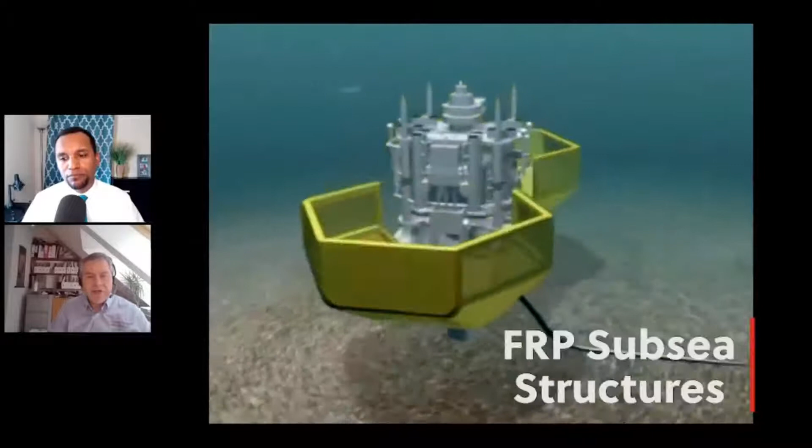This is where CapEx savings can come in with FRP. So let me explain the cocoon. This is an NOV product, as we call it, the cocoon and shroud, and it's a wellhead tree protection structure.

In shallower waters, particularly where you have wellheads installed like this, they're vulnerable to dropped objects from above, and also particularly vulnerable to fishing systems from fishing boats that are trawling in the area. So these structures need to be protected in some way.

In shallower water, traditionally what customers would do is install some sort of steel protection structure. This would be a freestanding structure over the whole of the tree, and that is inordinately big and expensive to do. So the cocoon is quite an innovative alternative to this.

It connects directly to the tree. It doesn't need independent foundations. It gets its strength and integrity from actually attaching itself to the flow base of the tree. It primarily comprises of these two large doors. You saw those in the graphic.

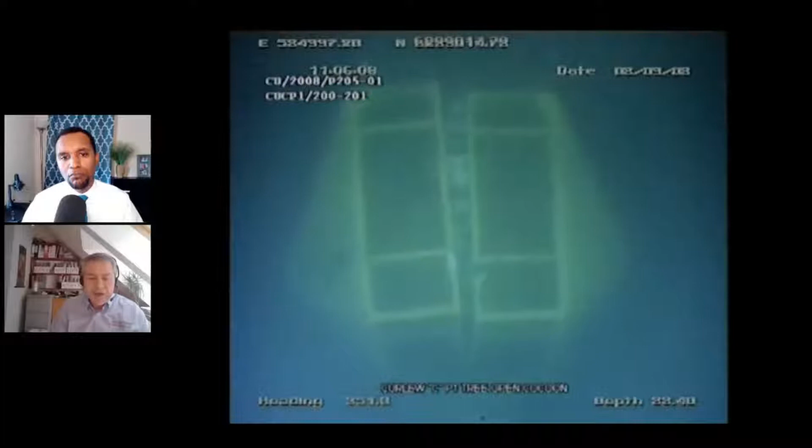Here you can see a subsea video of the cocoon with some divers working on the installation of the cocoon. These doors fully open and allow incredible access to the tree that's inside, the cocoon is actually protecting itself. So when these two doors are closed, they completely wrap around the wellhead and completely enclose it, protecting it.

These doors are pretty big, about 6 meters wide and about 5 meters tall. You can imagine these doors in steel would be extraordinarily heavy. Each door in steel would weigh around 4.5 tons in air. Now in FRP, each door weighs only 1.5 tons. So you can see straight away there's this massive saving in weight coming into play.

But if you look at that weight subsea, because the density of fiberglass FRP is only around 2, that weight almost halves. The weight submerged for each half is only around 0.75 of a ton. So this makes a structure which, while it's large, is very safe and very easy to open.

Operators can use perhaps smaller vessels, which are cheaper to use, or they can even use airbag systems, all of which are cheaper in cost. So from a CapEx point of view, the cocoon brings the advantage of being able to use smaller vessels for the installation phase, as well as for the operational opening phase.

Initially, this service started as a means to outfit our FSTs with the technology to help with remote support. It's an augmented reality headset that we attach to a hard hat, and it has a little viewer that goes right in front of their line of sight. It gives them basically what is akin to a 7-inch monitor in front of their eyes. They're able to move that viewer up and down, so it's out of the way if they don't need the two-way video. It also has noise canceling headphones. So what they're doing is putting on the headset, putting on the headphones, and then connecting back to our remote support services at the office.

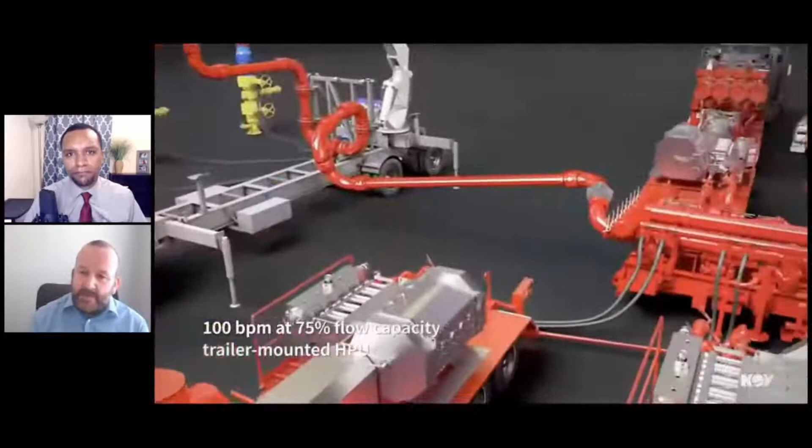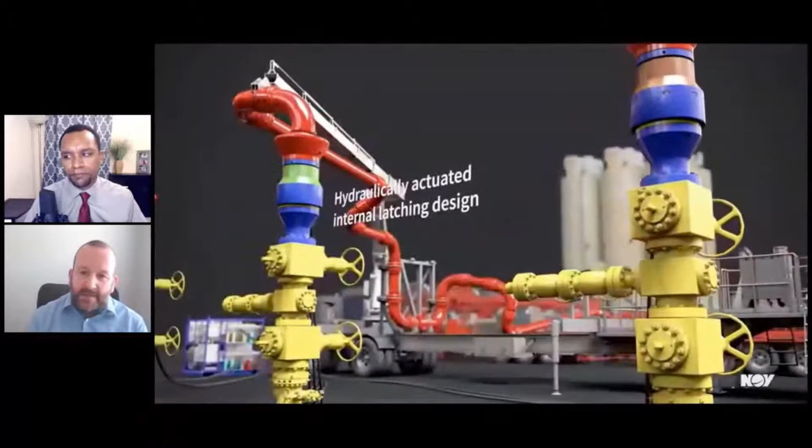In terms of the benefits, the main benefit of the FracMax system is that for the customer, the rig up and rig down time is dramatically reduced. Typically, if it's 2 days to rig up a conventional zipper manifold setup and 2 days to rig down, that's a total of 4 days. With FracMax, you're looking at 1.5 to 2 days. So you can get the equipment on site quicker, off site quicker as well, and the customer can then increase their utilization of the equipment.

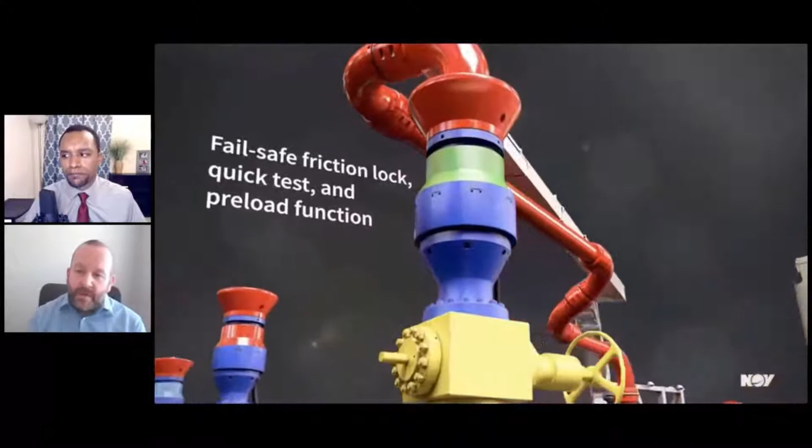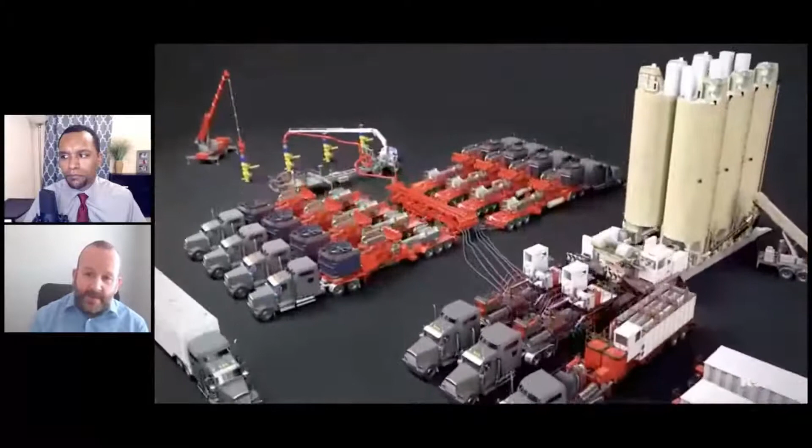The second part of it, though, is the number of assets that the customer has to manage. Every item in a conventional setup, in terms of the flow line, has to be managed, tracked, and certified, typically every 6 months. Now, what we're doing with FracMax is reducing the number of components that need to be managed by 90% typically.

So when you look at this particular area of opportunity, one of the questions that could come to mind is, why now? Why tackle this challenge now?

Operators, drilling contractors, oil field service companies, rental companies, kind of everyone in the oil field can reduce risk and costs of their operations by eliminating the guesswork on how best to use and maintain their assets with a good asset tracking software. A colleague said it's not a luxury anymore, it's a necessity, and I really believe that. So Max Track and Trace delivers much needed confidence, clarity, and cost savings to customers.

It's going to allow them to always know they're selecting the right tool for an application, so they're not adding cost or risk to an operation. It's going to help them simplify workflows so that they can improve efficiency, and it's going to allow them to make informed, data-driven decisions on how best to use and maintain their assets so they can increase uptime and reduce maintenance spend.

So when you're looking at PowerBlade and you incorporate it into your operations, what kind of impact are you looking at when you have this piece of technology?

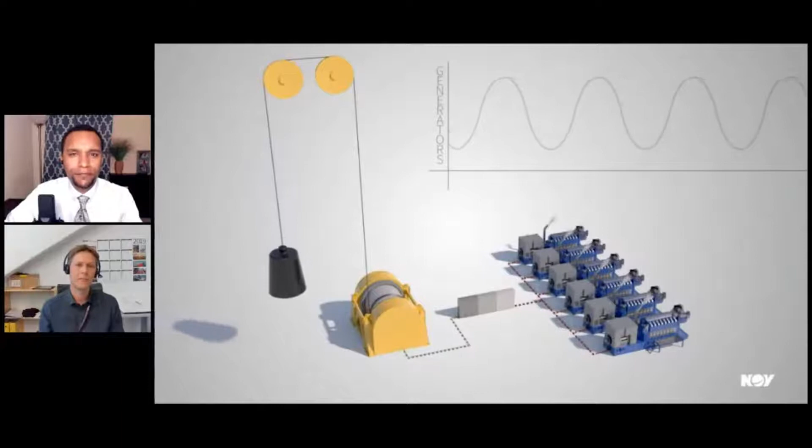Well, first of all, you have something which we call peak shaving and load leveling. And what you do is basically, like the animation shows, you have a typical drawworks on the left-hand side, and your generator sets on the right-hand side. So the load curve you see on top, each time you hoist the load, you need to generate enough energy to do that. And when the load is lower down, you generate energy back to the system.

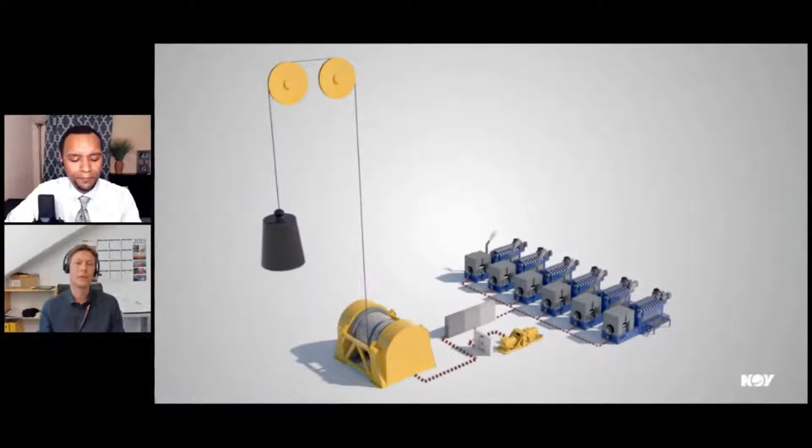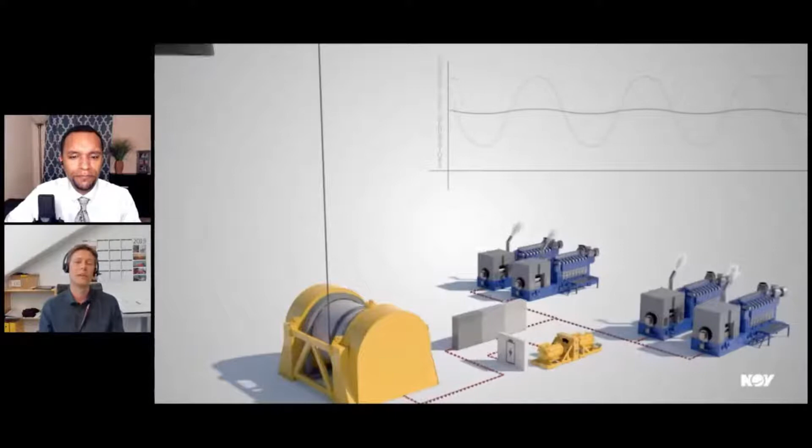So here you can see how PowerBlade can receive the energy that's generated by the drawworks when the load is lower down. That energy can then be used for the next load cycle. The curve on the right-hand side is flattened out, and that is basically the load that the generator sets will see. So you use PowerBlade to take off the peaks and allow it to actually handle those peaks of energy.

It's really interesting. I mean, the design, I know there's a lot of very precise engineering that goes into it, yet at the same time, man, it's the simplicity of the concept that's really attractive to me. But that's really neat.

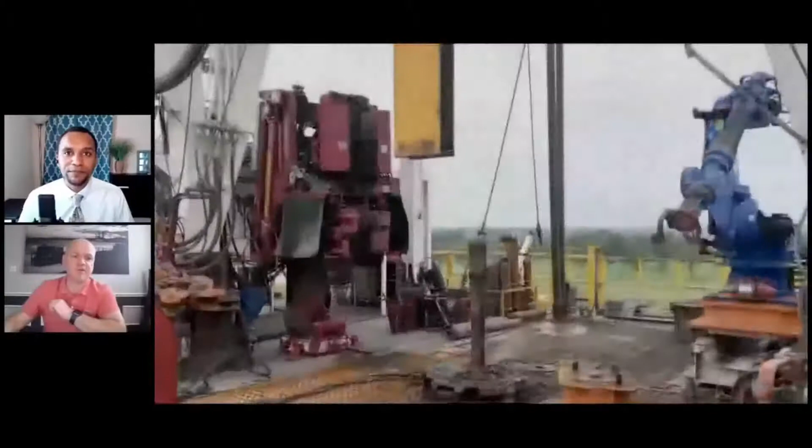So onshore, I beg your pardon. Onshore, we have the SDV machine, which is an upper arm which moves pipe to and from the setback area. But we have a very big gap in that product portfolio. We've never really had anything on the floor that could take care of the bottom of the pipe. It's certainly nothing that we could term as a product or product line. I mean, we've done some custom solutions before.

So what we're looking at here, from a land perspective, is how we can be taking robotics and applying them to the drill floor where they can integrate with our existing equipment. As you can see in the video here, we have a lower arm that's tailing the pipe to well center, working in an integrated fashion with an iron roughneck.

So tripping and tailing on land for sure, but then there's also the ancillary tasks such as doping and mud containment, thread protectors, stabilizers, all the sort of tasks that are still being done by humans, and even more so in the land market, for sure.

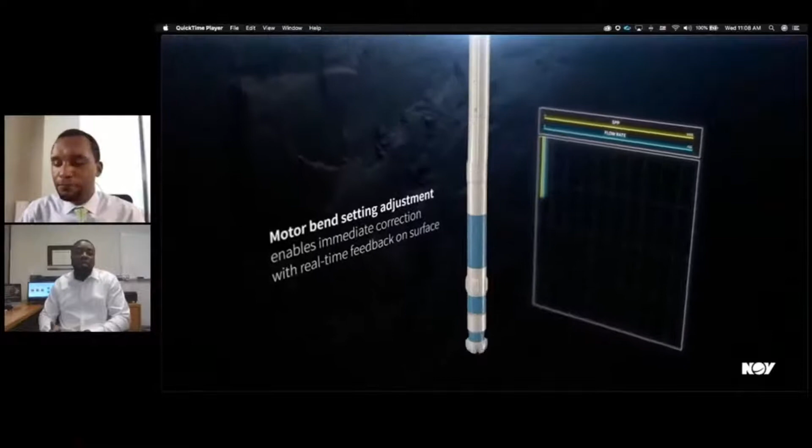Yeah, so with traditional drilling motors, if you want to drill a directional well, you set an angle or a bend on the motor, and you essentially push the drill string to build the curvature you're trying to do. However, you are limited to that one bend setting. And so with the SelectShift, we have a technology that allows you to change the bend setting downhole.

And if you can do that, it opens up a window for you to have a more efficient well, to drill a more in-gauge hole, and to put less stress on the BHA. So it gives you the benefits of having a more efficient BHA. And so, really, that makes sense. I get where it's positioned, certainly, employing it in your overall BHA program.

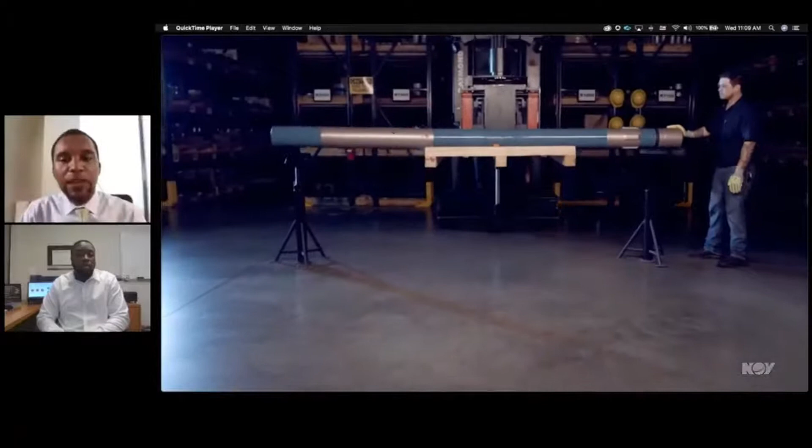So maybe I want to talk about the actual process of shifting the motor. Can you talk about that, and then also maybe how you can go back to a previous motor setting? Correct. I can do that happily. So when you are shifting the SelectShift, it comes with two bend settings. And so you're either going from a low bend setting to a high bend setting, or from a high bend setting to a lower bend setting.

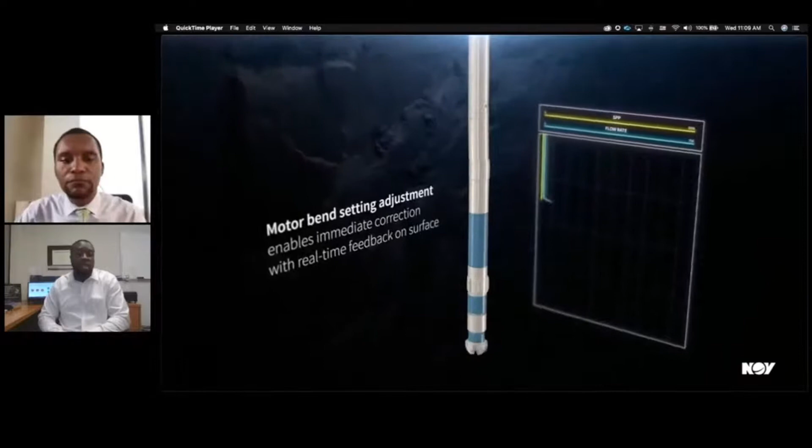So the tool is designed to always default to its low bend setting. And we do that so that if you have any difficulty shifting, you still have a bent motor in the hole, and so you can still complete the operation. We designed the tool to seamlessly integrate with your rig operations. We shift the tool using flow and RPM. So just flow and string rotation.

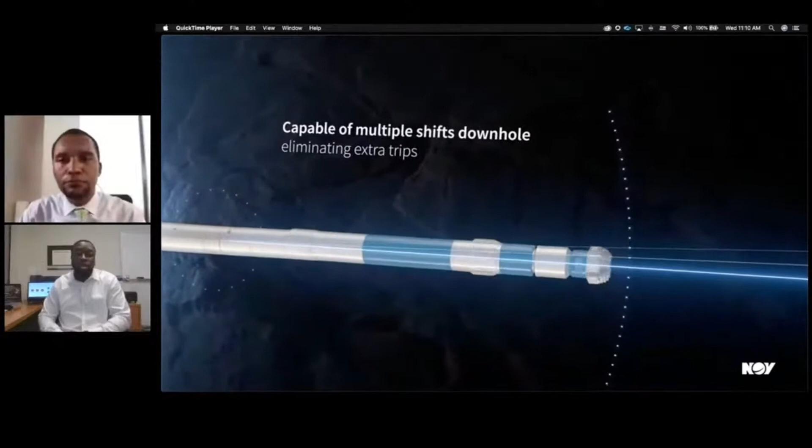And so when we talk to customers and when we come to your location, we are not teaching you anything new. You don't have to learn anything new in order to run the SelectShift. It works in line with rig operations.

All right, and those are our top picks from this year. Did you agree? Did you disagree? Or are there any other moments you would rather include in there? Or let us know what your favorite moment was.